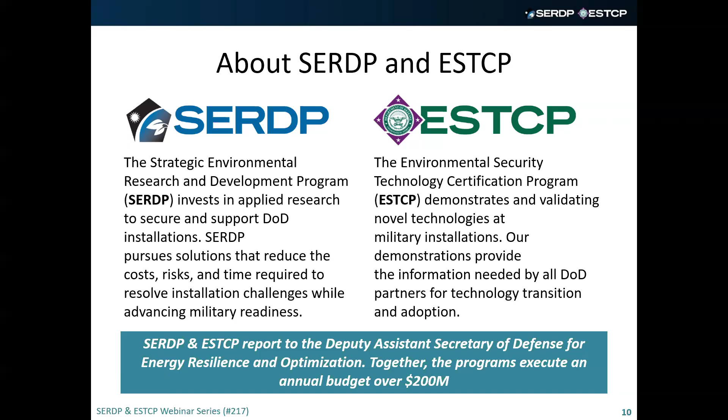ESTCP demonstrations collect unbiased cost and performance data to support defense managers and end users with the information they need to implement approved technologies and facilitate DoD adoption at scale. SERDP and ESTCP report to the Deputy Assistant Secretary of Defense for Energy Resilience and Optimization, headquartered at the Pentagon. We work closely with other OSD programs, the services, and defense partners to facilitate the adoption of successful technologies. By fostering cross-program integration, we ensure that promising innovations do not remain isolated research efforts, but transition effectively into operational use.

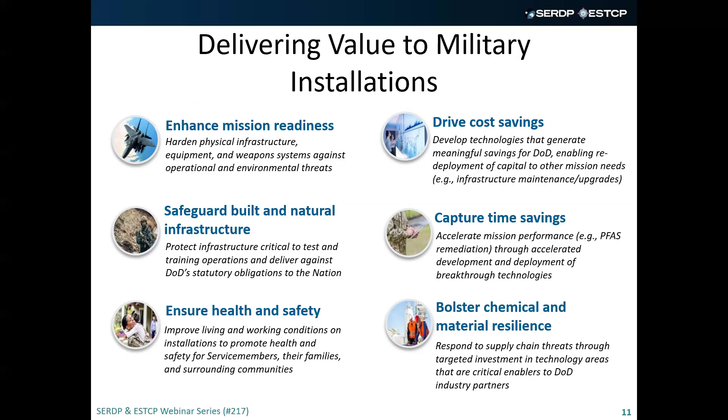Our projects align with national security priorities and provide the data and capabilities that DoD leadership need to shape guidance and instruction aimed at securing our military installations. Our science and technologies protect built and natural infrastructure, strengthen DoD chemical and material resilience, and ensure the health and safety of our warfighters.

Our research portfolios are organized across six program areas. The Environmental Restoration Program area focuses on managing PFAS and other emerging chemicals of concern in the environment.

The Resource Conservation and Resilience Program area focuses on sustaining the 28 million acres of DoD lands for test and training operations. The Weapon Systems and Platforms Program area that I manage focuses on strengthening DoD's long-term chemical and material resilience, extending the service life of mission-critical weapon systems and platforms while reducing costs and enhancing the safety and efficiency of military operations.

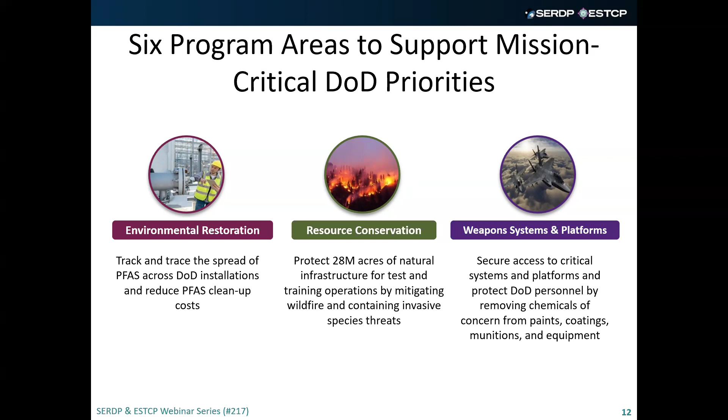The Installation Energy and Water Program area demonstrates and validates technology that improves access to reliable and resilient sources of energy, providing greater flexibility in the control and delivery of power.

The Natural Hazards Adaptation Program area demonstrates innovative and cost-effective technologies to ensure DoD installations can withstand and recover from events such as earthquakes, hurricanes, floods, and wildfires.

And finally, the Munitions Response Program area focuses on unexploded ordnance in the underwater environment, including ponds, lakes, rivers, estuaries, and coastal ocean areas. After years of successful investment, the program area is currently transitioning technologies to end users through a series of test sites and live demonstrations.

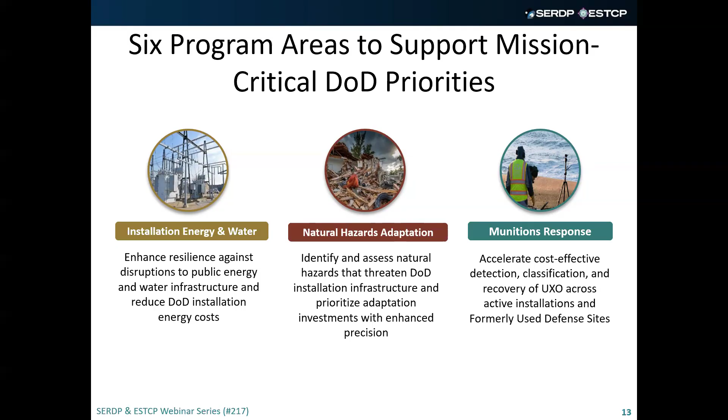SERDP and ESTCP are a critical funding source and partner for hundreds of federal, university, and industrial R&D efforts. We release solicitations throughout the year. Researchers from federal government, private industry, and research institutions can apply to SERDP and ESTCP for funding opportunities.

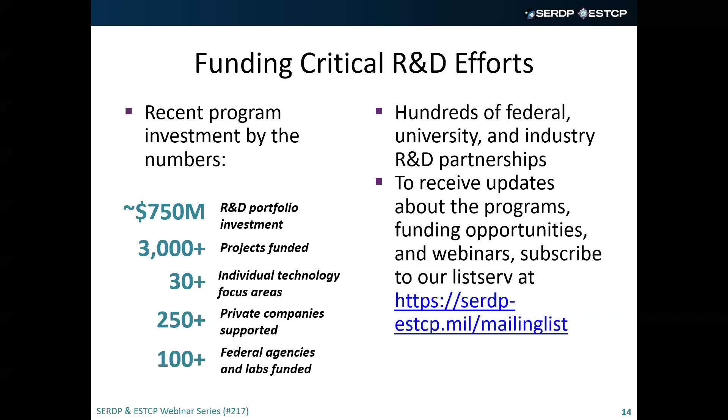SERDP and ESTCP are funding a broad range of PFAS-related projects. You can access an overview of our PFAS program as well as project descriptions on our website.

The boxes along the top of the graph illustrate workshops that have been held to develop a strategic plan for addressing PFAS issues. A summary report was prepared for each workshop to summarize the discussions and to identify research, demonstration, and technology transfer needs. To view workshop reports, just click on the associated boxes at the top. This is also on the website.

Each SERDP project has an associated box with the project title, which links to a full description of the project, as well as any reports that have been published as part of the project. Each ESTCP topic listed represents a single topic. Click the project title to go to the project web page.

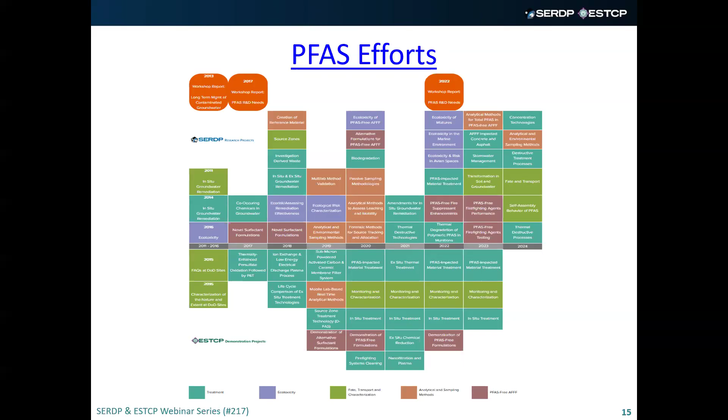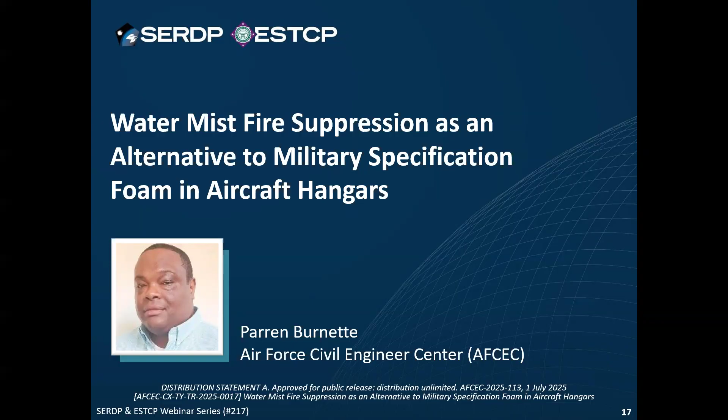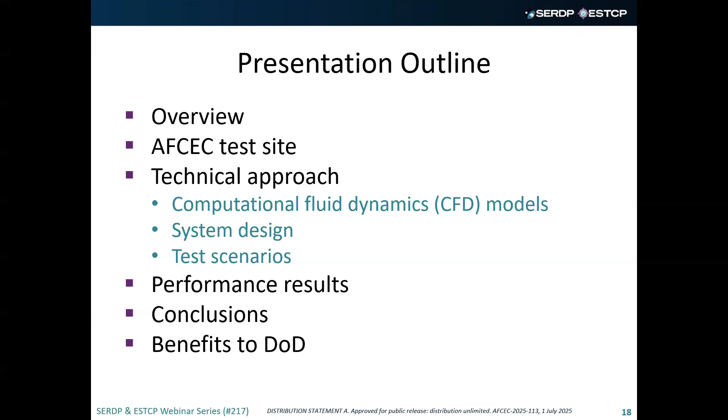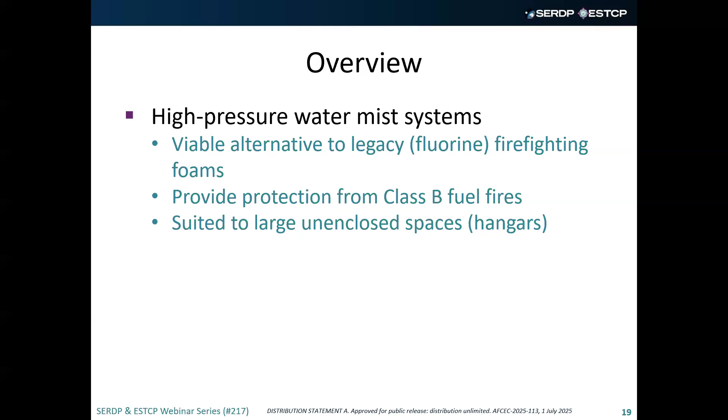This right here is our test facility at Tyndall Air Force Base. This is our hangar, out in the middle of nowhere. We can do different size fires at this particular location. This is representative of a small maintenance hangar, and it's full of instrumentation for fire testing.

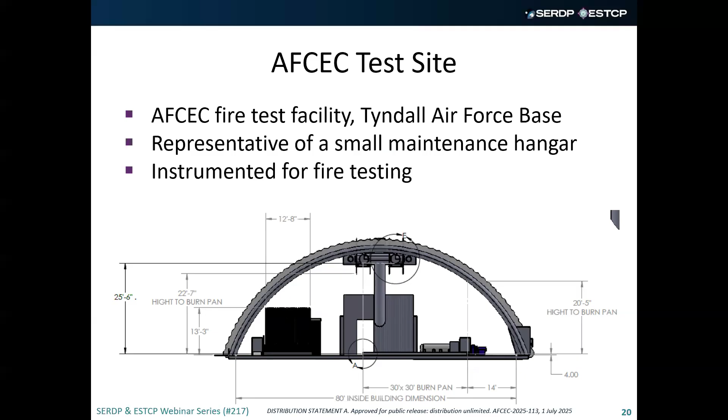So this is our approach for this particular project, our technical approach. Water mist is 99% droplet of water. We decided to use this approach here, the basic 101 for fire, the fire triangle. Everybody knows that if you remove one of the legs, you lose the fire. You remove oxygen, you lose fire. You remove the heat, you remove fuel. So everybody knows that. So this is our approach.

We feel increasing surface area between water droplets and air will remove the heat, resulting steam. That will remove the heat as well as the fuel. The water droplet displaces the oxygen, so they will put out the fire as well. And also, water coats flammable surfaces, so that would remove the fuel. That's our approach for this particular project.

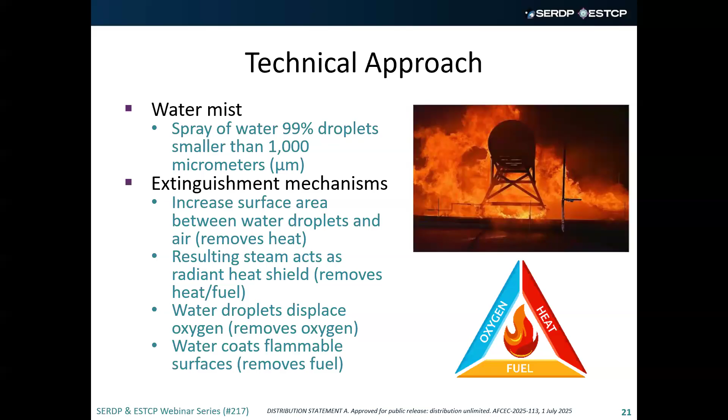So to start off, and like most projects, we do modeling for this particular project. We reached out to the University of Maryland to help us out with this particular part of the project. And from their modeling, they found that only a high pressure system could extinguish a Class B liquid fuel fire. And I will go into detail on what they mean by extinguish. A low pressure floor mounted system could suppress a Class B fire, and I will tell you more about what they mean by suppress as well.

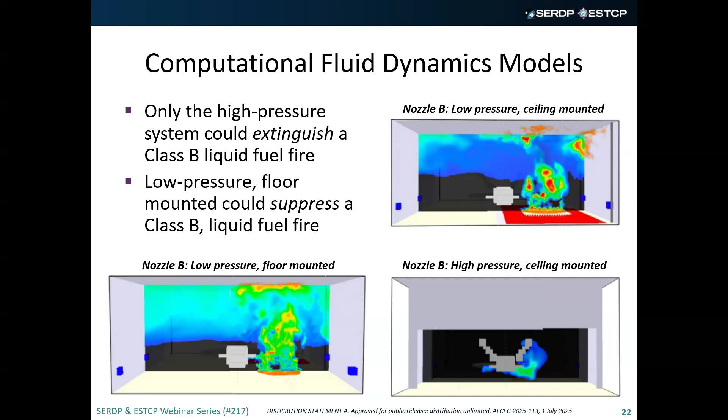What you see there are the results from their modeling. Also, from their model, a high pressure water system provides fire control, and I will explain to you what they mean by control. Floor nozzles can deflect flame, and we will show you that in our live demonstration. Combined ceiling and floor nozzles are better than just ceiling, and I will show you that as well. They also showed that wind in the hangar really doesn't have a big impact on the performance of the system. The nozzle height less than 3 meters has minimal impact on the performance as well. And I will go into detail about all of this during my presentation.

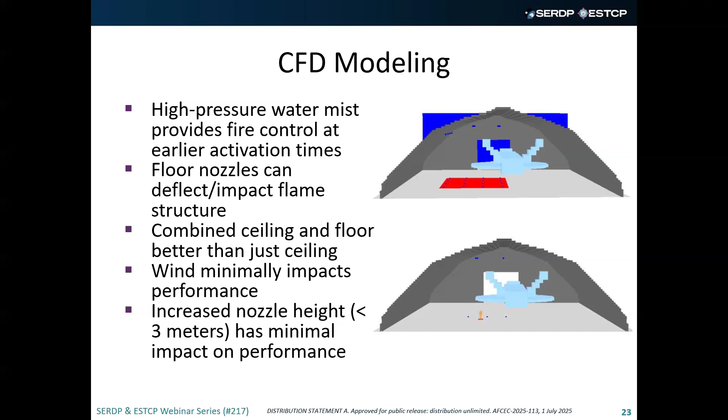So, gathering the data from their modeling, we decided to go with the Marioff HI-FOG system, and this is a commercial off-the-shelf system. That is the reason why we went with that. They have a high pressure system ready. All we have to do is get it installed into our hangar that you saw on the previous slide. This particular system has an operating pressure of 1600 psi.

We used it on a 30 by 30 foot concrete pad, activated at different angles, at different nozzles. We have it over the wing as well as under the wing, and then we also have it when everything is combined, the under the wing and over the wing system operating. We used the system at 1015 psi.

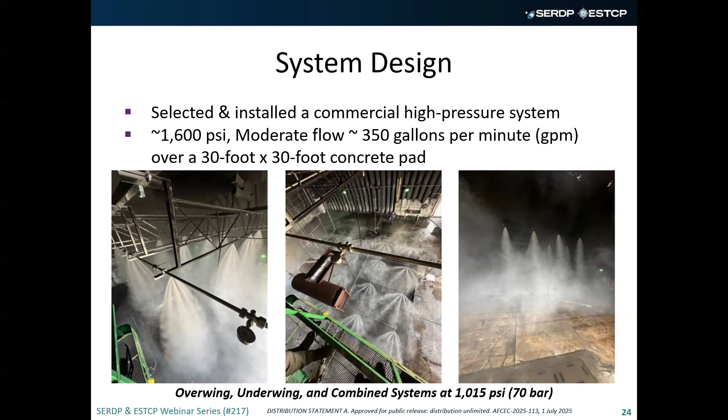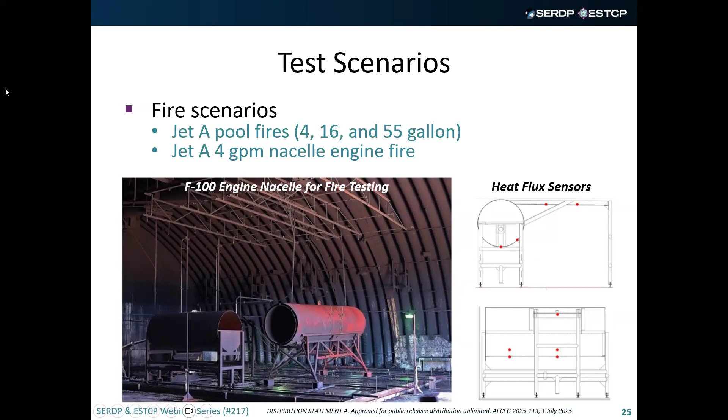Baron, this is Rula. I'm sorry to interrupt you, but we're picking up a lot of background noise, ruffling paper, potentially a keyboard. So if you don't mind speaking into your speaker and try to minimize that noise, we would appreciate it. Thank you. Yes, ma'am. All right. So, probably my chair.

All right. So, this is what we mean by fire control. This is the performance criteria. This is limit the heat release rate of the fire, pre-wet combustibles, and control ceiling gas temperature to prevent structural damage. This is where our heat flux sensors read less than 50 kilowatts per square meter. That's our goal, to keep it beneath that. And with that reading from our heat flux sensors, we consider the fire controlled.

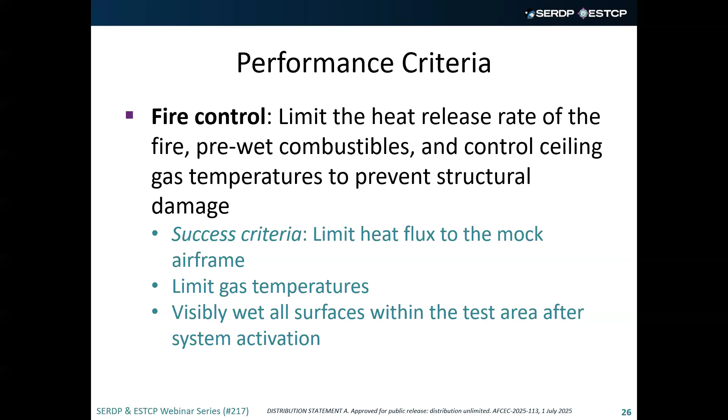Here, what we mean by suppression: the success requirement is reduce the heat under 35 kilowatts per square meter within 30 seconds of activation. All right. And fully extinguish means fully extinguish the fire, where the heat flux sensors read 0 kilowatts per square meter within 45 seconds of activation.

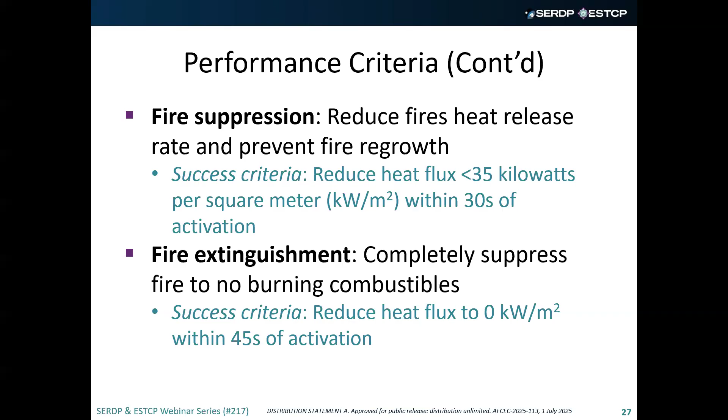So here's our results for the test, and this is the result of suppression versus extinguishment. As you see, we got it all broken down into 4-gallon pool fires, the 16-gallon pool fires, as well as the nacelle with the flow rate of 4 gallons per minute, and we also had a result for the 55-gallon pool fires. The green means the fire was suppressed, extinguished. Then the red means it was not.

As you can see, with the 4-gallon pool fire, the fire underneath the wing was successfully extinguished when we combined the under the wing nozzle as well as the over the wing nozzle. And what we mean by over the wing nozzle and under the wing nozzle, that is the floor mounted nozzles and the ceiling mount nozzles. When we combined the two, we were successful. Under the wing, we were successful, but over the wing, we were not successful through any of the tests, because of the way the nozzle sprays from the top, getting blocked by the wing.

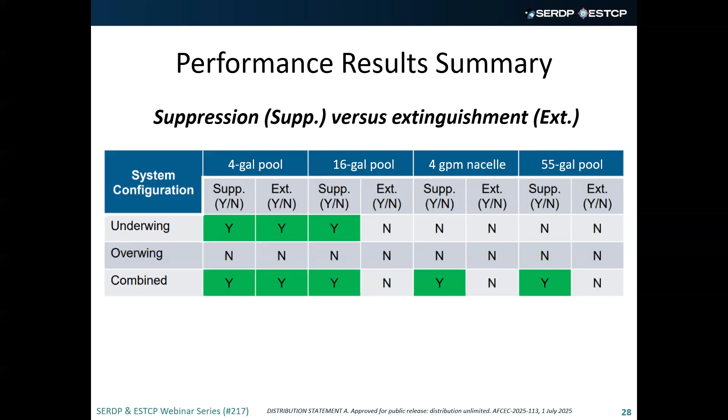So this is more detail of the test results. The 4-gallon pool fire, as you can see, under the wing, over the wing, and combined results. So we had it suppressed under the wing within the 30 seconds. In fact, we got it underneath the 35 kilowatts per square meter at 3 seconds, as well as the 23 seconds you see there for extinguishment under the wing. Visual extinguishment means we use sight, and we also use imagery. We use IR sensor imagery to give us that number.

As you can see with the 16-gallon pool fire, that is our results. And I forgot to tell you, the pre-burns in the first column, that's how long we allowed the fire to burn before we activated the system. Catch up here.

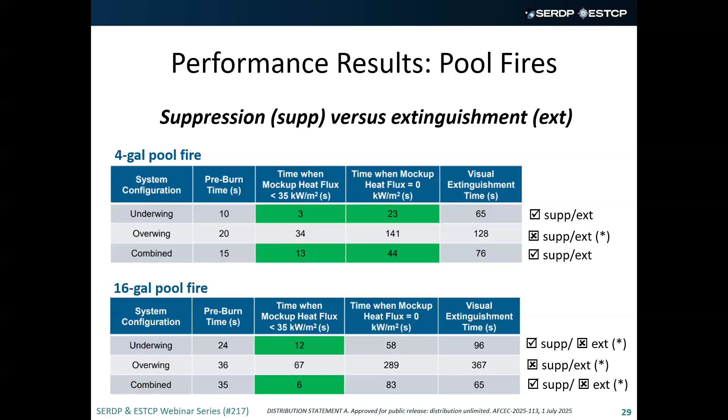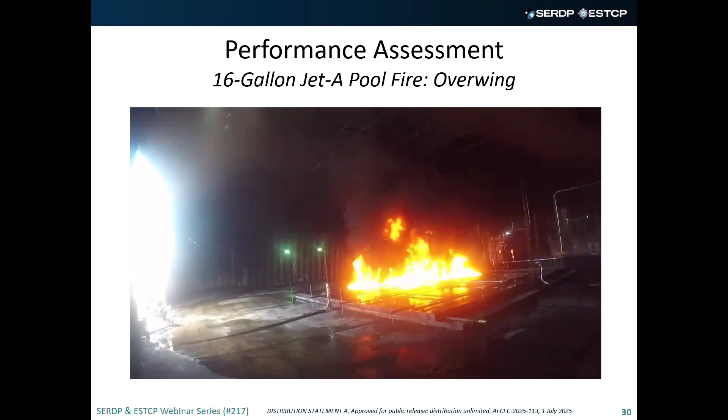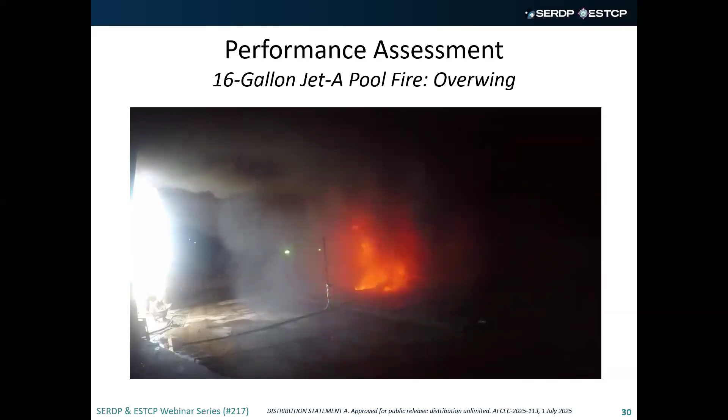So here, this is a test showing our 16-gallon jet fuel fire. And this is the over-the-wing nozzle trying to extinguish this particular fire. So we dump the fuel, we lit it, we give it the pre-burn, and then we activate the system. You will see what happens. And that's the system activated. There you go.

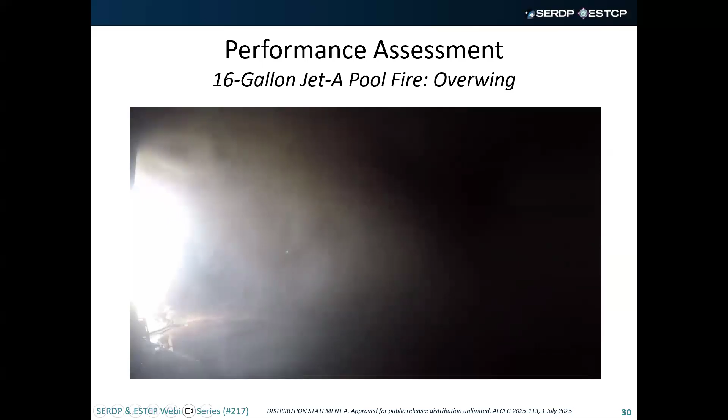All right, so this is the fire that you see with the IR camera. This is 30 seconds after activation.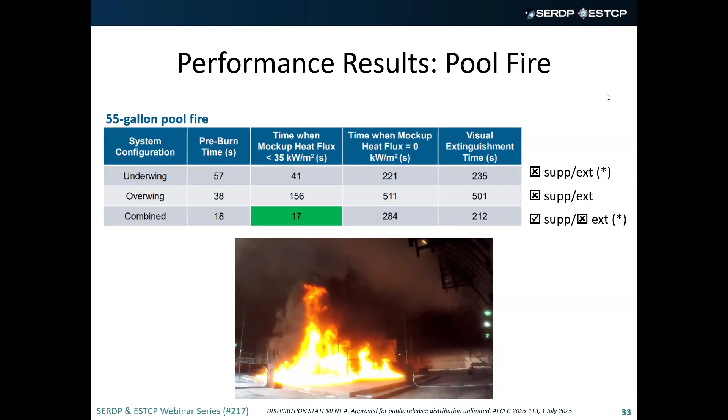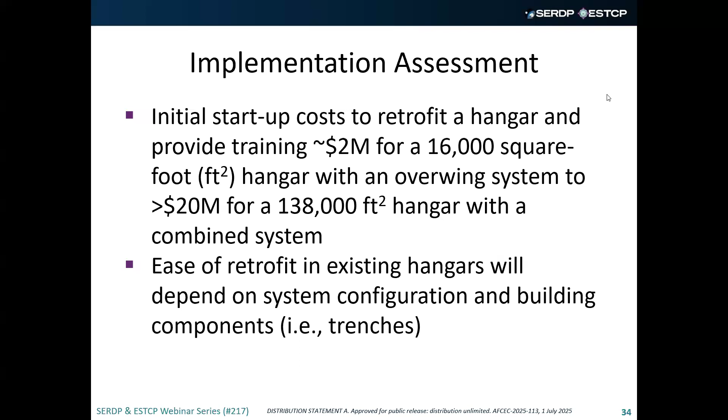So for this particular setup, initial cost was around $2 million for a 16,000 square foot hangar with an overwing system, which is the ceiling nozzles. It's over $20 million for a 138,000 square foot hangar with a combined system, which means the floor as well as the ceiling nozzles. To retrofit an existing hangar, it depends on the hangar as well as what is inside of the hangar. Some hangars have trench systems, so it varies. So we couldn't really put together a cost for that using the commercial off-the-shelf system that we used.

So the floor system we selected is unidirectional, but is designed for the aircraft to be put perpendicular to the nozzles. One of the things is the water mist system creates a fog droplet which can obscure the vision for the firefighters when they arrive. As you saw in that video, it's very smoky inside of the hangar when the system activates.

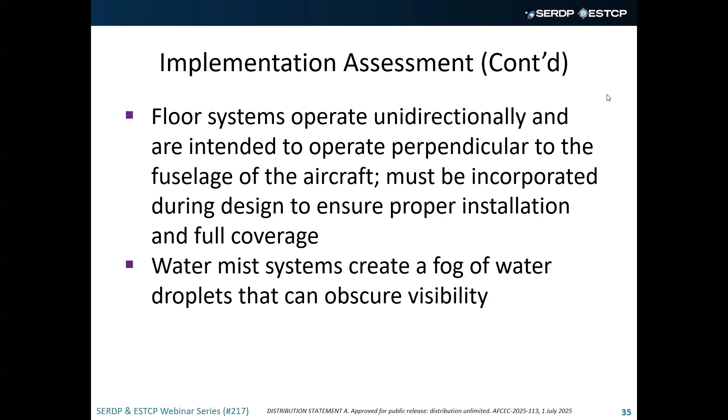So what we conclude from our tests is that the high pressure water mist system is a viable alternative to the foam system. Our test did validate the FDS by the University of Maryland. Also, we can't extinguish some of the 4-gallon size fires, but we successfully suppressed and extinguished some of the fires, which gives enough time for firefighters to react and take over. We suppress the fire long enough for firefighters to get there to take over and complete the job.

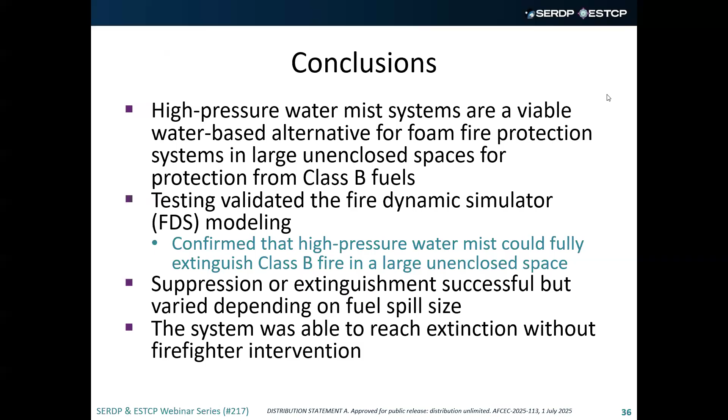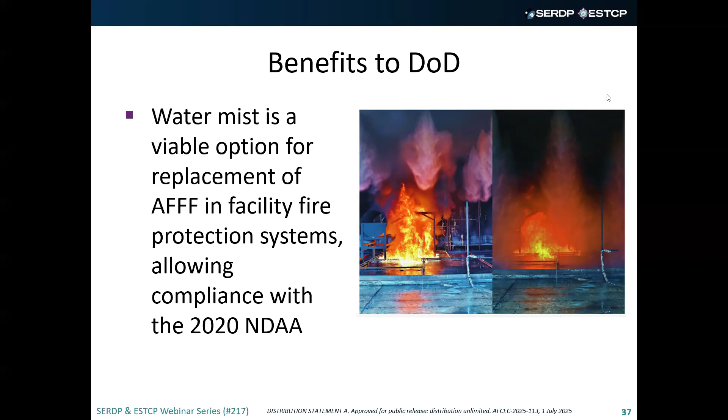So yes, as I stated before, our system does meet the 2020 NDAA, which directed the stop of the use of AFFF. This is a good alternative for that particular requirement. That concludes my presentation.

Great. Thank you so much, Perrin. We have received a number of questions. So we're going to start with one from the Defense Centers for Public Health in Aberdeen. For the mist applied fire suppression system, are you aware of any military facilities that have adopted this approach? And what are the limitations with using such a system versus using a PFAS-based system?

The goal for this one is to replace a PFAS-based system. Because as of October 2024, the Department of Defense made it that we can no longer use an AFFF-based system at all. So the goal for this is to replace that particular system. No, we do not have any base that is using a high pressure water mist system just yet. One of the reasons is the cost, and another reason is that the hangars are already built, and to get a system like this would be very expensive.

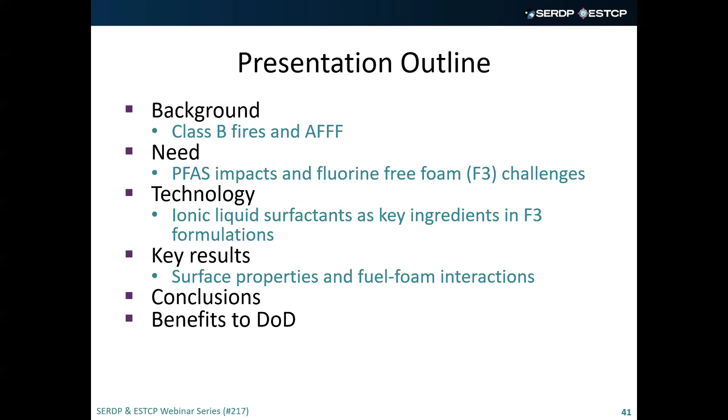And then at the end, with conclusion remarks and some of the findings that will benefit the Department of Defense. And as Farron has already covered a lot on the Class B fires, I won't spend that much time on it, but I do want to mention the use of AFFF, which contains PFAS, for Class B fire suppression. So AFFF has been a tremendous material as far as suppressing Class B fires is concerned,

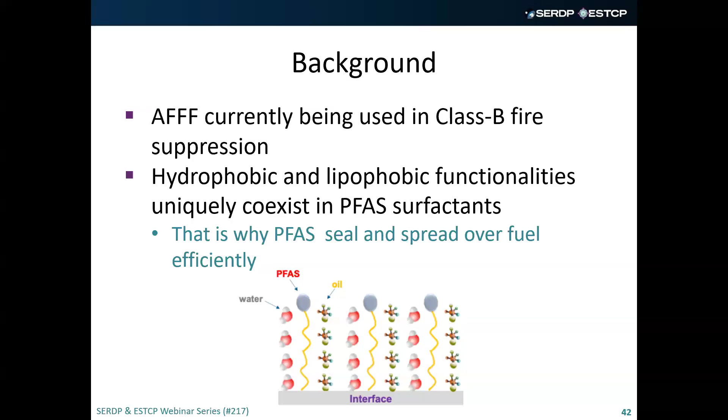due to the reason that the PFAS in AFFF is a very unique molecule which has the hydrophobic and the lipophobic functionality coexisting on the same molecule, which allows it to form a seal over the burning fuel, and as such, it cuts the oxygen supply and also allows the foam to spread very quickly and efficiently on the hot fuel surface. But one critical property which we really think has worked for PFAS is its interaction or non-interaction with the fuel vapors or the hot fuel molecule during the fire extinguishing operations.

So we all are aware of the concerns about PFAS. We are aware of the initiative taken where the use of PFAS is no longer valid for firefighting operations. So there was a need to develop a solution for Class B fires which doesn't contain PFAS. But fluorine-free foam faces many challenges. And some of those challenges are that the surface tension doesn't go as low as with the fluorinated surfactants. A sealing thin film is not formed on the fuel.

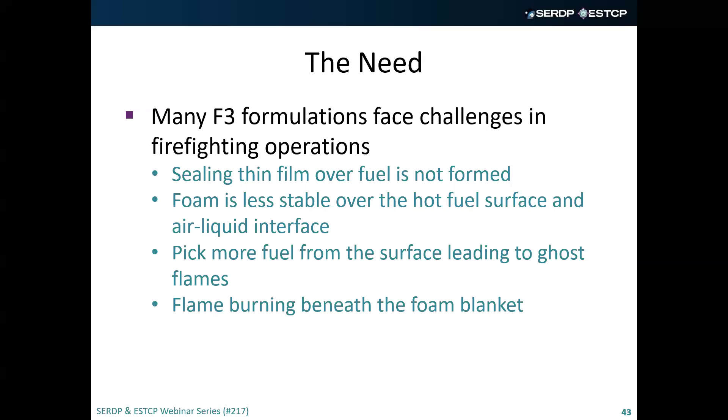And then there is no lipophobicity on the hydrophobic part of the fluorine-free surfactants. So for that reason, there is some level of interaction between the fuel vapors as well as the hot fuel surface with the foam, making the foam less stable. And also during the operation, it has been observed that these surfactants pick up fuel from the fuel surface, leading to what we call the ghost flame, or the flame burning beneath the foam blanket.

So thinking of all these challenges, we came up with an idea of using surface active ionic liquids as surfactants to provide an effective and eco-friendly fire suppression on Class B fires. And our target was to come up with a foam which is stable on the hot fuel surface, which cools the hot fuel and effectively seals off the flammable vapors.

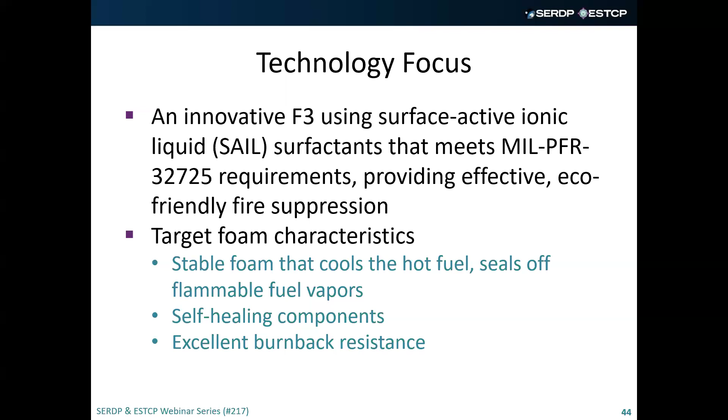But at the same time, and this came up as we started working on it, we thought that probably some kind of a self-healing component needs to be there in the foam so that when the surfactant interacts with the fuel vapor, or they get desorbed or reacted or burned, those should be very efficiently replaced with new surfactant molecules, giving the foam excellent burn back resistance.

And remember, initially, when these fluorine-free foams were being tested, yes, they were inferior in terms of fire extinguishing time. They were much inferior in terms of burn back resistance time. So why choose ionic liquid?

And I still remember, and I heard that there was a question from Florida Poly, that's the time when we proposed my stint at Florida Poly, that I proposed the idea of using ionic liquid because ionic liquid has high heat of vaporization. They have very high thermal degradation temperatures. Some of the thermal degradation temperature is very close to the PFAS material in AFFF.

In addition to that, because you can tune the cationic or the anionic part of the ionic liquid, that allows you to have a very effective fire suppression and burn back resistance due to some level of resistance to the interaction with the fuel vapors at the elevated temperature.

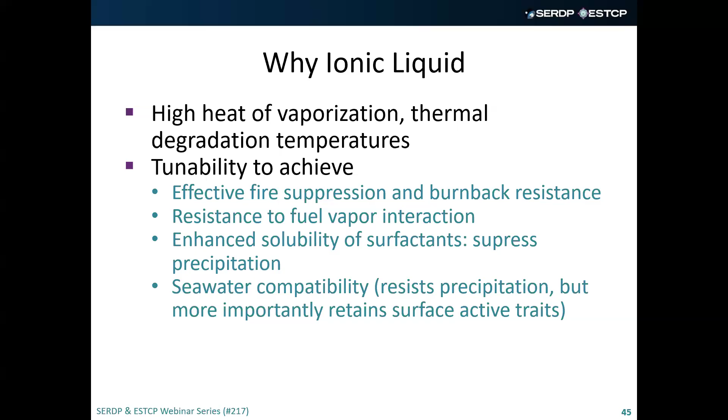But also, these ionic liquids enhance the solubility of the surfactants and suppress their precipitation, especially in seawater. So ionic liquid in seawater resists the precipitation while maintaining the surface active trait. So I will share some of the data here that the surface tension or the dynamic surface tension or the foamability, some of those criteria are not that impacted when you dissolve these surface active ionic liquids in seawater as compared to that in fresh water.

So how did we start? We started where there's a plethora of those ionic liquids which are available. There's a lot of data. So we did some theoretical modeling. We also used COSMO screening to obtain spreading coefficient values of a lot of ionic liquids, single ionic liquids or ionic liquid in the presence of other surfactants, and then chose the ionic liquid which gives us near zero or positive spreading coefficient values.

Because again, initially we thought that the whole scenario is all about the surface tension and the spreading coefficient. One other thought that we had was the carbon-fluorine bond is the most polar bond. The electronegativity difference is maximum, and that is where it draws the lipophobicity or the hydrophobicity or the non-benign nature of these PFAS materials. We thought, okay, what if we replace fluorine with oxygen? So with a theoretical calculation, we wanted to know if there is an advantage.

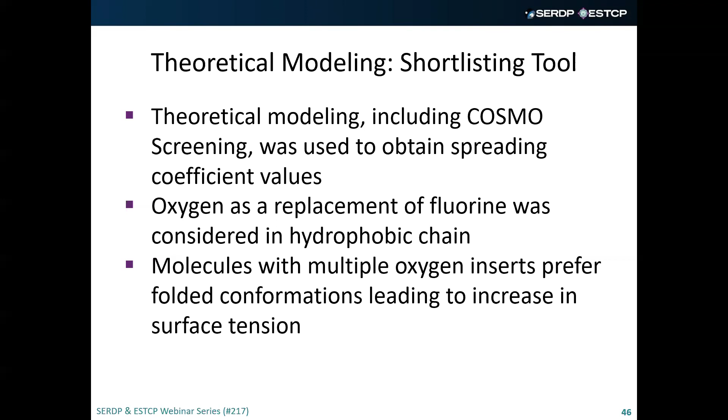And to our surprise, the replacement of fluorine with oxygen in the long chain actually led to some level of decrease in the surface active properties of the surfactants. There was an increase in the surface tension, and what we could think is that these long chains actually had some kind of folded conformations, allowing a higher surface tension than you normally anticipate with the long chain.

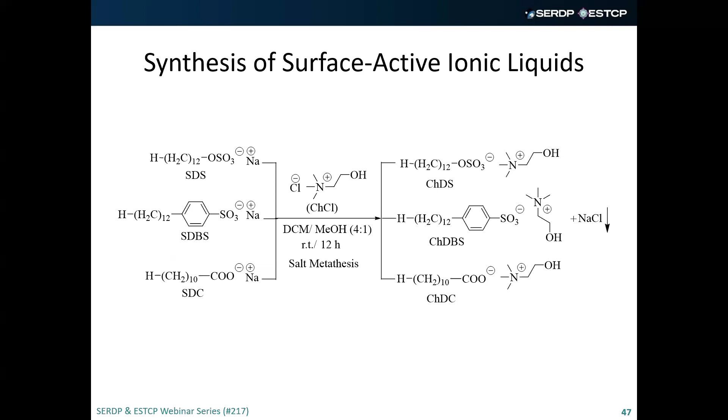So keeping all those learnings from theoretical modeling or COSMO screening, we went ahead and synthesized close to 30 different ionic liquids with different cationic groups and different anionic groups, starting with imidazolium, pyridinium, and also choline chloride, with different alkyl chain lengths from C8 to C18, with a view to have a surface active ionic liquid that will give us surface tension very close to 20 millinewton per meter. So we did the experimental screening using the force tensiometer.

We studied the CMCs of the various ionic liquids. We mixed different ionic liquids. As I said earlier, we looked into the different chain lengths. Normally, it is expected that as the chain length increases, the surface tension decreases. We found it to a major extent, but when the chain length increases beyond 14 carbon atoms, that's when the surface tension starts increasing.

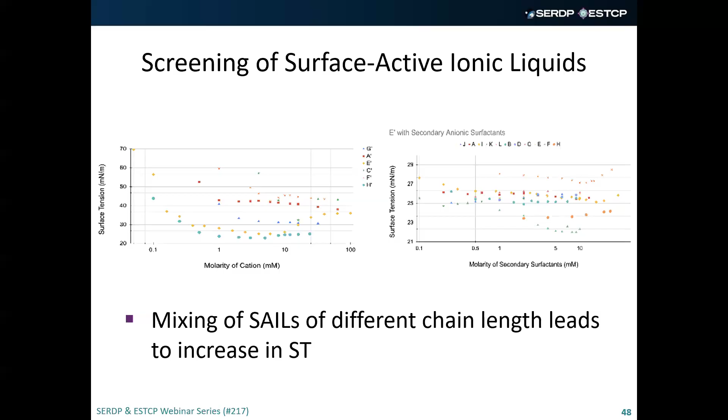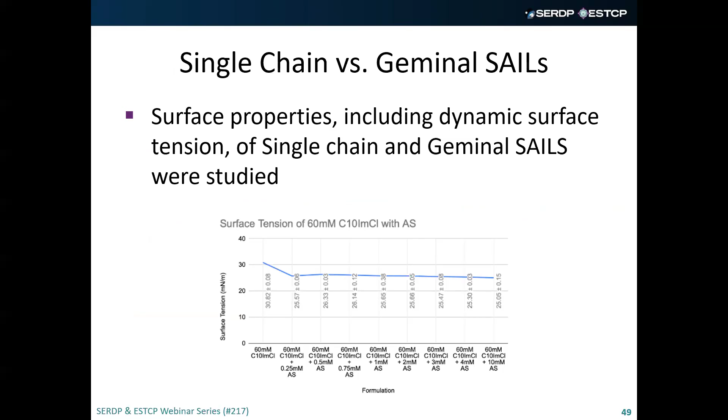We also mixed different ionic liquids with different chain lengths together in a solution in order to find out the impact of these chain lengths on the surface tension. And that also gave us some mixed results, but mostly in that case there was an increase in surface tension. The idea was also to look into what if the long chains are attached to the same cationic or the same anionic group, called geminal surfactants. And we did a detailed analysis on that.

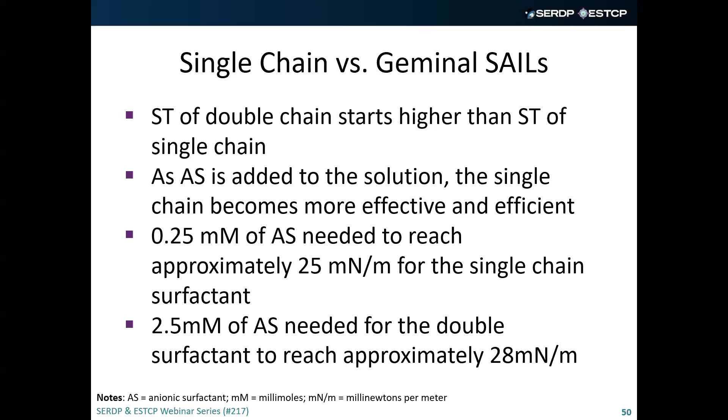Once we screened and shortlisted the ionic liquids, meaning the cation that gave us the best surface active properties, and identified the chain length or mixture of chain lengths, we started developing a fluorine-free formulation, type 3, and initially also looked into type 6 formulation, studying its surface tension.

What we found was that in addition to these ionic liquids, some other hydrocarbon surfactant needs to be added for us to have a greater density of surfactant molecules packed at the interface. This is easily seen from the increase in the CMC of the solution along with the further decrease in surface tension, so we obtained a formulation with a near positive spreading coefficient.

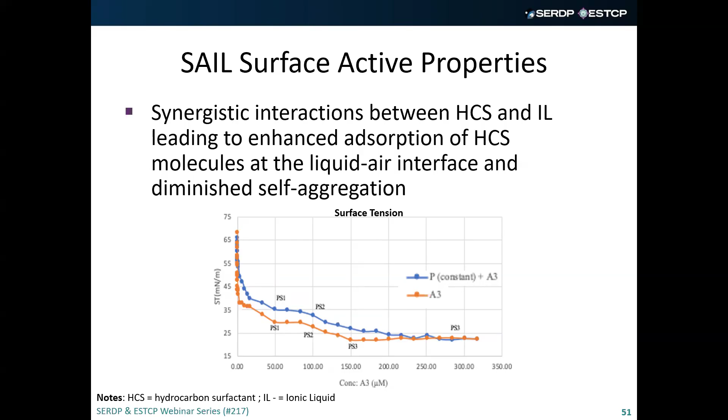We were very happy, thinking we were close to finding a solution that would extinguish firefighting foam for Class B fires. So we started testing that.

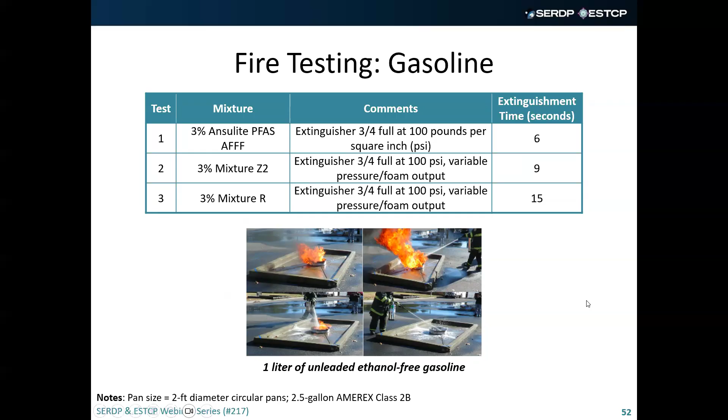Some of these testings were done at firefighters' locations, where we tested with gasoline and hexane, and then compared the results with PFAS. What we found was that the fire extinguishing time we obtained with one of the formulations was very close to AFFF.

Seeing that result, we got excited and said, let's look into that. Since we started with a very small initiative in a very small lab, doing large scale testing at 28 square feet was not possible, so we started looking into that.

Are there any learnings from this small scale testing that will allow us to predict the performance of these PFAS-free formulations on larger scale fires?

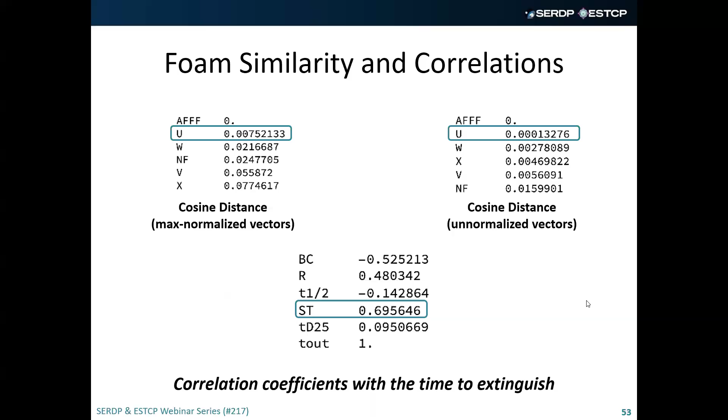So we looked into the surface tension, the bubble count doing the DFA analysis, and the radius of the bubble size. We found a correlation linking surface tension, bubble radius, and bubble count as the most important criteria for a firefighting foam to perform well when tested on a large scale.

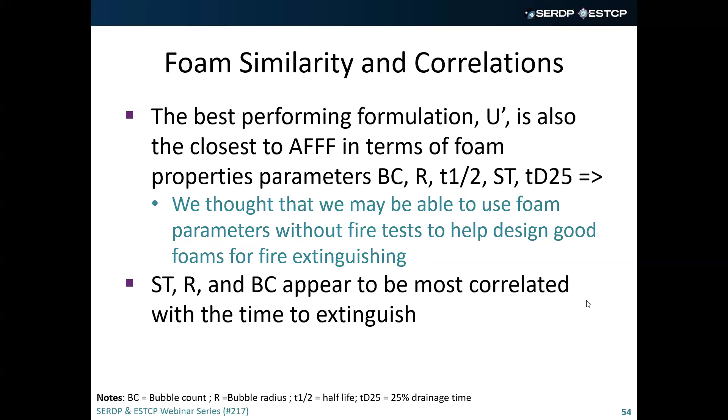We were even thinking at that time, why go for a large scale fire? We had all these observations and probably had deciphered a code. Keeping that in mind, we went to NRL for testing on a 28 square foot fire with gasoline and jet fuel.

And guess what? We failed miserably. The foam extinguished the Jet A fuel fire, but took longer than the mil spec requirement - 50 seconds to extinguish it. The burn back resistance time was also shorter than required, and it failed to extinguish the fire.

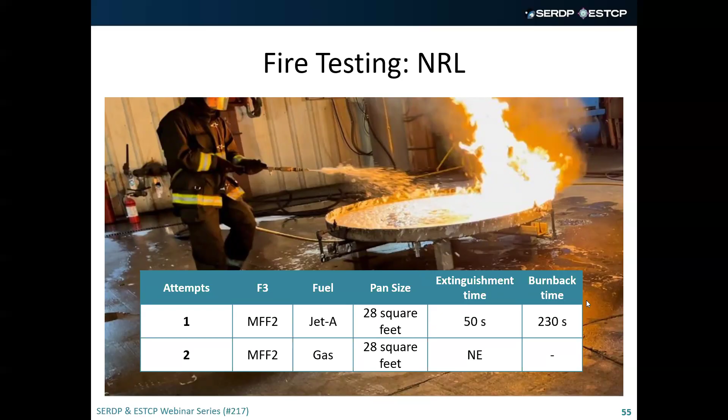For us it was a big setback, but there were learnings from it. The learnings were that the fuel-foam interaction is very critical to having a good quality fluorine-free firefighting foam. The stability of the foam at the fuel-foam interface, especially at elevated temperature, is very critical.

The foam stability, along with the cooling impact of the foam, is also critical, because for me, it was very difficult to even stand when this 28 square foot fire was being conducted - there's very high temperature in there.

We also observed that flames were coming through the foam blanket. That tells me the fuel is readily being transported from the surface of the fuel through the foam blanket and getting into the environment, and that also impacted the burn back resistance.

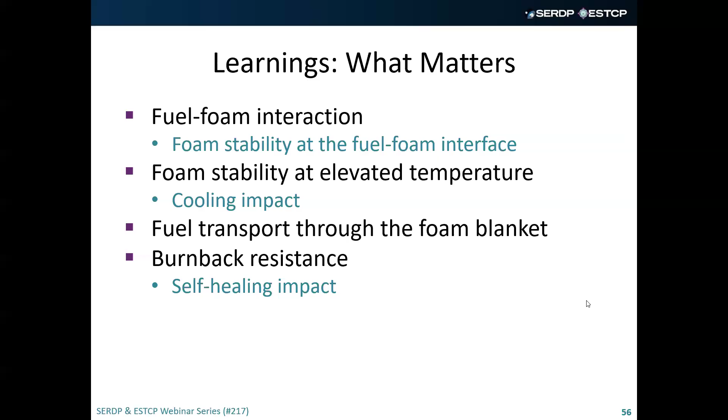That was the first time we realized that foam stability is a criteria, and interaction with the fuel is a criteria, especially at elevated temperature - some level of interaction will always take place. So we need a formulation where any surfactant molecules consumed by this interaction get replaced. We went back to the drawing board and started looking into how we could study this on a small lab scale.

So we designed a Ross Miles column with two compartments, one for the fuel and the other for the foam. This Ross Miles column gave us the capability to control the temperature both on the fuel side and the foam side - we could heat the fuel to various temperatures.

We took the temperature from 40 degrees C to 60 degrees C for two different types of fuel, hexane and gasoline. And we started looking into the stability of the foam, from the height of the foam and also from the travel of the fuel vapors across that foam blanket.

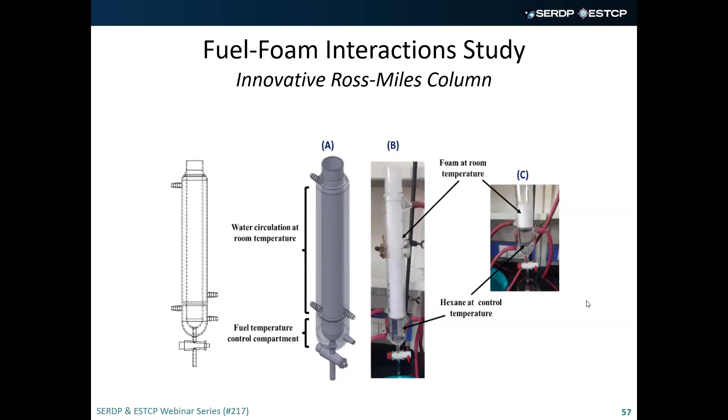This system gave us a lot of information, and we tested various fluorine-free foams. We looked into which formulations gave us the maximum stability and the minimum interaction with the fuel, and that allowed us to further improve our formulation.

We started testing it in the lab on a smaller scale using a glass pan, which was around 9 inches in diameter. We tested it with hexane and heptane as fuel. And as you can see in these pictures here...

For the first time, we had evidence that the fuel or some kind of film formation is taking place, that there is some level of self-healing property. So after extinguishing the fire, we used the propane torch to reignite the fuel, and there was a lot of resistance shown by the foam, which didn't allow the fuel to catch fire.

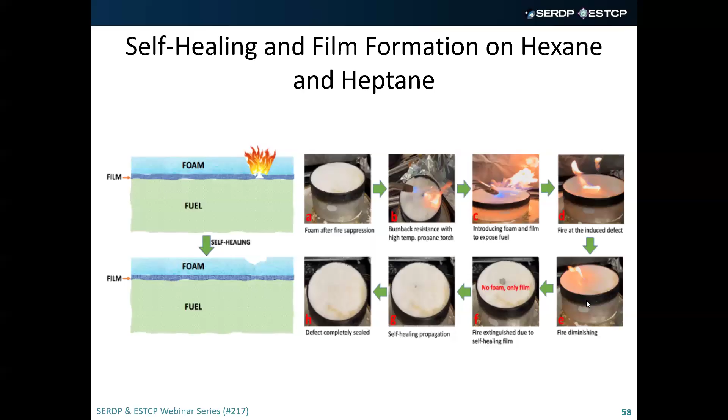With these results, we went again to Navy Research Lab for testing, and to our pleasant surprise, the formulation we tested—a couple of formulations were tested at Navy Research Lab—we extinguished both fuel fires, the gasoline and also the jet fuel. The extinguishing time was 50 to 56 seconds with gasoline and 28 seconds with the jet fuel.

But more importantly, the burn back resistance time. The burn back resistance time for gasoline was 7 minutes 15 seconds, much longer than the mil spec requires, which is 4 minutes. And the burn back resistance time for jet fuel was more than 9 minutes, very close to 10 minutes—it was 9 minutes 40 seconds.

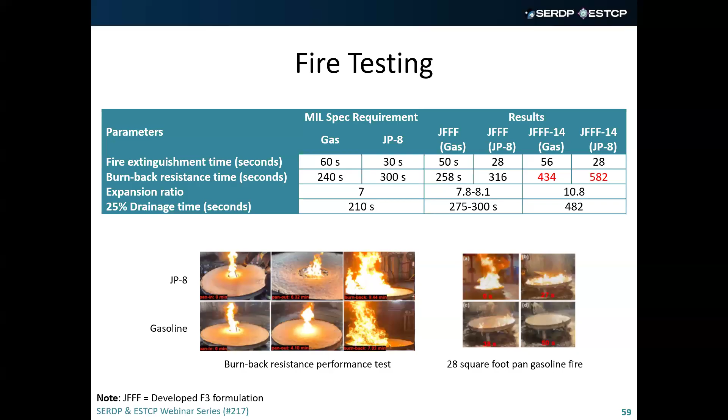Excellent results that we got for the formulations tested on a 28 square feet fire. We started working more in the lab and developing a correlation between what we saw in the lab testing and what we were seeing in the 28 square feet fire at NRL.

What really changed, what was the major observation that was so strongly linked with the observation at 28 square feet, was the foam stability, which is also related to the interaction of the fuel vapor with the foam.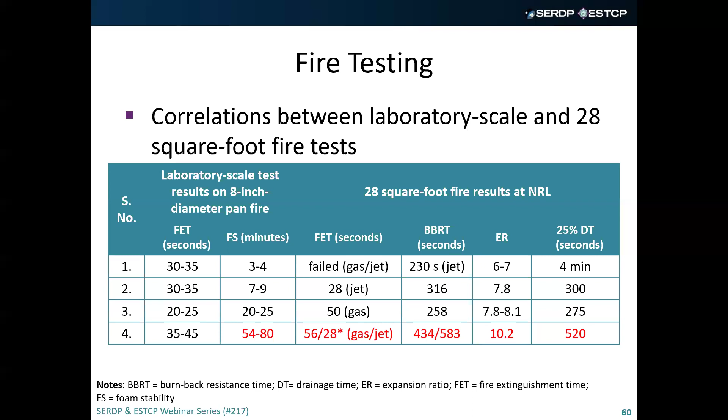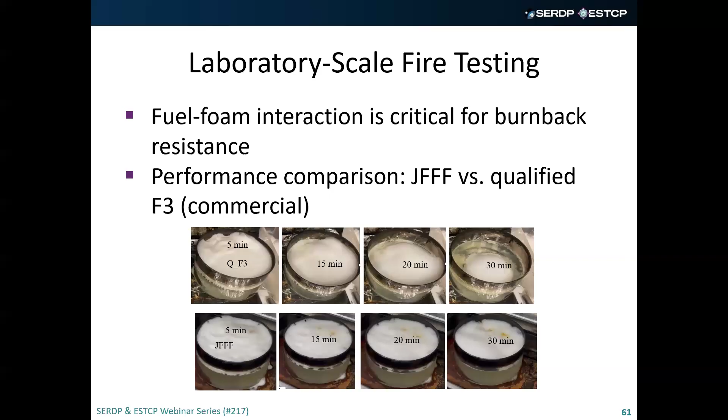Another critical aspect, shown in this slide, is what I meant by fuel foam interaction or foam stability. We tested the formulation we developed in the lab, which passed the mil-spec requirement, against some commercial F3s available. We looked into foam stability of the formulation. On top is a commercial F3 formulation remaining stable on the fuel surface - this is alcohol-free gasoline - stable for around 20 minutes. That's when you see a hole, and the blanket almost completely diminishes in about half an hour. But the formulation we developed remains stable on the hot fuel surface for close to 1 hour. In around 30 minutes, we don't even see a significant decrease in foam height with our formulation on alcohol-free gasoline.

The question we encountered quite early when we started thinking about using ionic liquids is their toxicity. Many ionic liquids are known to be toxic, and for us that was a concern. So we did a very systematic study, even before all this testing, where we studied various ionic liquids - changing the cationic group, the anionic group, the chain length from C4 to C14. We looked into the toxicity against the fathead minnow fish. The testing was done according to EPA standards, and we were able to identify some ionic liquids with very little impact on the survival rate of these fish.

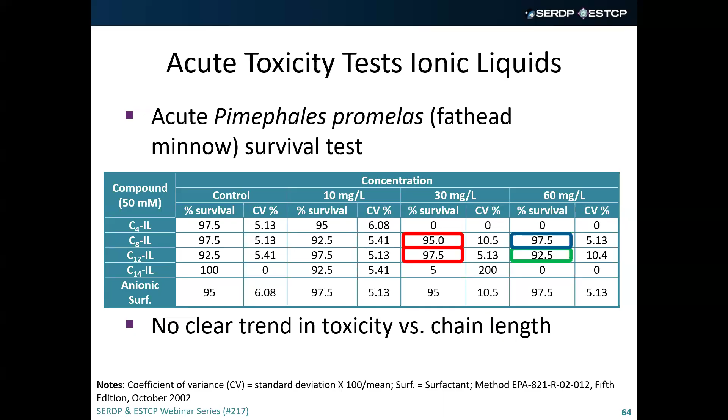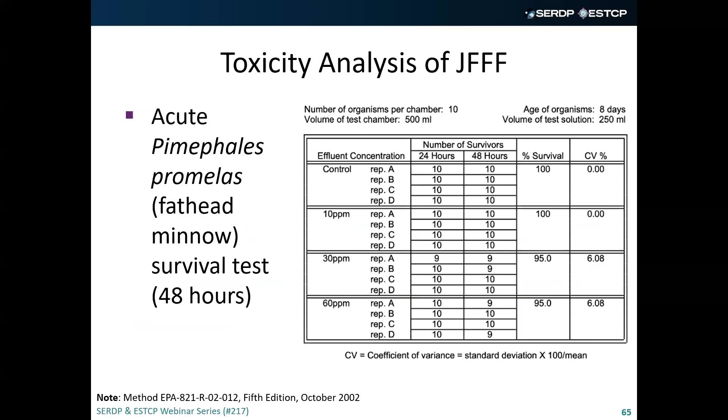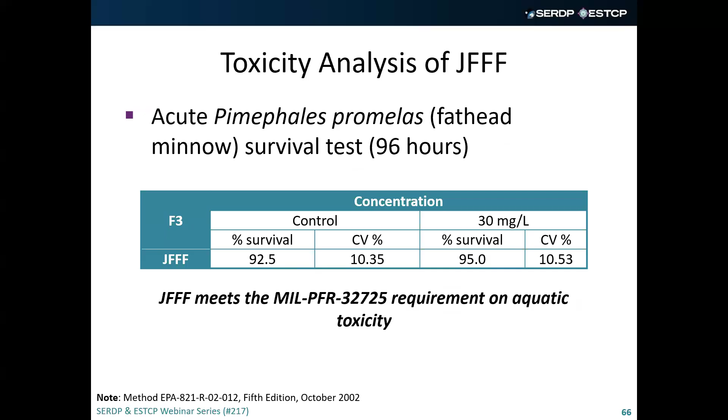For a concentration of 10, 30, and 60 mg per liter, the survival rate of the fathead minnow was above 95%. We also tested the formulation which passed the mil-spec at 10, 30, and 60 mg per liter, again according to EPA standard at a third-party lab, and found the survival rate above 95%. The earlier slide showed testing done for 48 hours. The mil-spec requires testing at 96 hours, so we did that too, and the survival rate is again 95%.

So in conclusion, what did we achieve? We formulated a surface active ionic liquid based fluorine-free formulation which meets the mil-spec requirement on fire extinguishing and burn back resistance time on jet fuel and gasoline. According to our findings, ionic liquids are very good candidates for fluorine-free formulations.

I know there have been other initiatives too, and what we found is it's not a drop-in replacement. You have to understand the interactions or chemistries that will change with the addition of ionic liquid to any drop-in replacement if we want to do it. Everything changes if you change even a single molecule in the formulation. Foam stability, as I explained, is a good parameter in lab scale testing to predict what's going to happen at a 28 square foot pan fuel pool fire.

Fuel foam interaction and foam stability at the air liquid, and more importantly at the fuel foam interfaces, are critical to achieve the desired fire suppression. You may have a positive spreading coefficient, a very low surface tension, a very good dynamic surface tension. But if the molecules in the foam are interacting with fuel vapors or fuel molecules at elevated temperature, that is significantly going to impact foam stability and fire extinguishing performance, including burn back resistance.

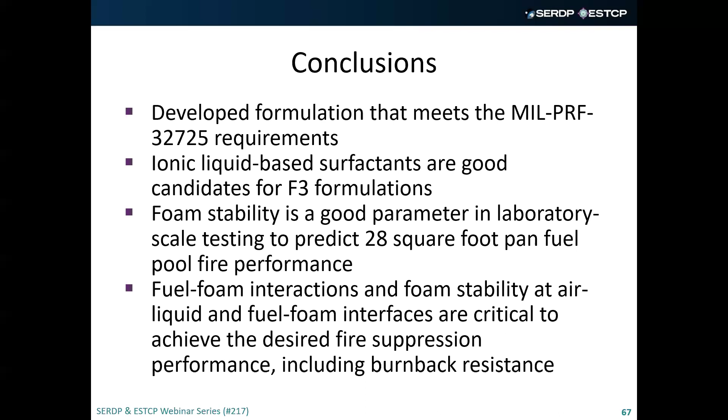Overall, the benefit to the Department of Defense is we have another formulation which has the potential to meet all the requirements specified in the new mil-spec guidelines - a formulation which is 100% biodegradable. We did that analysis too, the BOD over COD in 16 days. The BOD to COD ratio is 1.

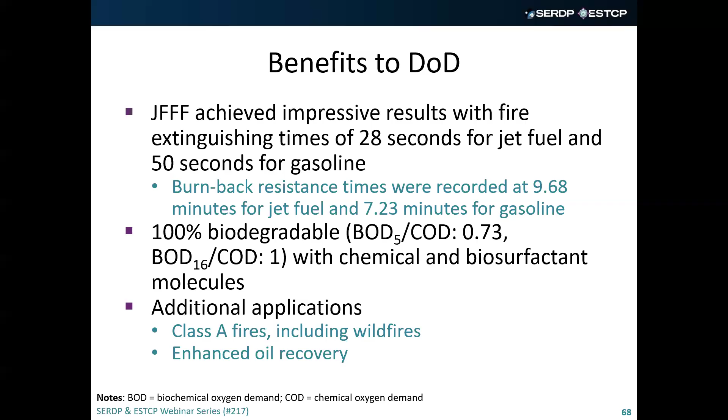Moving forward, we really feel that the ionic liquid surfactant will also have applications for Class A fires, including wildfires. And from some of the papers I've read, ionic liquids also have very good potential for enhanced oil recovery.